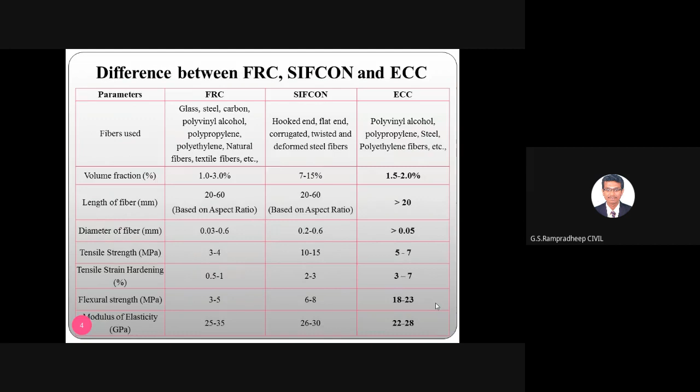For that, you need to optimize these materials by making various iterations. So my humble advice: don't go immediately for experimental work. Before that, make trial and error using software. You can go with Excel, or MATLAB, or ANN (artificial neural network analysis), or ant colony algorithm. There are different optimization softwares available. Even you can develop your own C programming coding, make the iterations and get the optimization results.

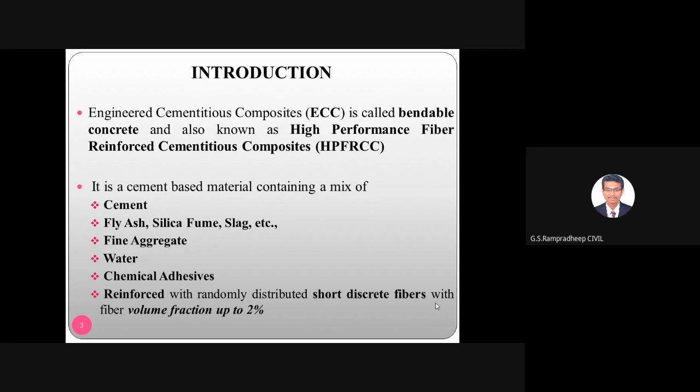Go to the experimentation work and find whether the simulated work as well as the experimental work get matched. So abroad, they are first going for simulation study using their own coding.

Or if you want to have the optimization, you can have the triangle chart. Mostly they will go for fine-tuning the cementitious materials - how to fix the fly ash, how to fix the silica fume, how to fix the GGBS, like that. This is called the ternary chart, TERNARY, ternary chart.

So we will see some literature background, one or two related to the importance of ECC or bendable concrete. Here in this ACI Material Journal, which is one of the top journals in the American Concrete Institute, they have used high volume fly ash more than the prescribed limit. Here we are using, as per regulations, not more than 27 to 30% as per the replacement of cement. So in this HVFA, high volume fly ash, to improve the ECC, they are concentrating on two properties.

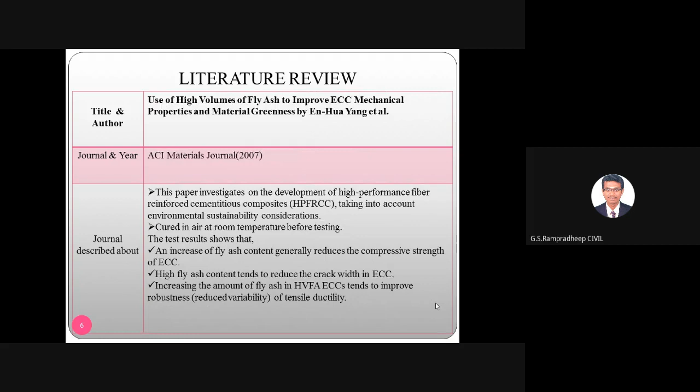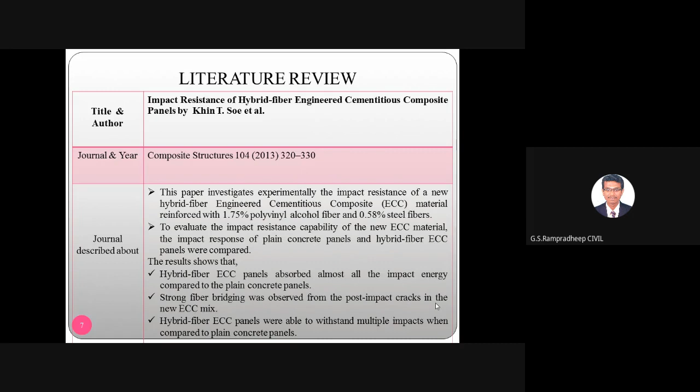So initially I showed you the article related to material as a replacement for cement. Second, related to impact analysis for structural property. Third, I am showing you the flexural behavior of ECC slab with PVA fiber, which was published by Shwan H. Said et al. in CBM 2015 edition.

2015 year of publication. What he described and investigated is the effect of polyvinyl alcohol fibers on the properties of panels like toughness, compressive strength, and flexural strength of cubes and slabs. This is what he observed in his study using polyvinyl alcohol fibers.

PVA fiber, how much is added is maximum to 3%, and it is observed that the compressive strength decreases as the reinforcing index increases.

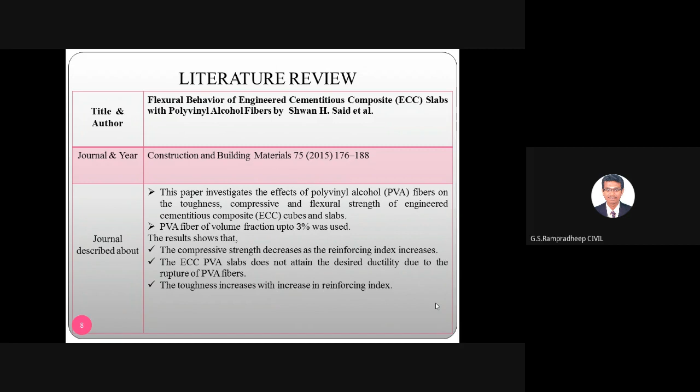The toughness increases with increase in the reinforcing index. The toughness means, in Tamil it is called kadinattanmai, the well bonding effect. Due to this well bonding effect, your membrane can be protected in emergency cases, right?

Next design is waterproofing manufacture, preparation of membrane in a well-designed waterproof. So matrix designed for waterproof ECC by Jing Yu et al., which is in CBM 2017 year of publication. It describes about waterproofing technique adopted with ECC.

See, normally, don't think that only for ECC we can make it for waterproofing. In normal concrete also we can go for waterproofing analysis, even if you are using epoxy, right? So you can make it as an impermeable membrane such that external atmosphere, humidity or something will not enter inside.

So in most applications for concrete or steel, they will go for epoxy coating. In steel, you can see a green color steel rod, which is an epoxy coated rod, where somewhat your steel will be durable and strong enough compared to a normal steel, right?

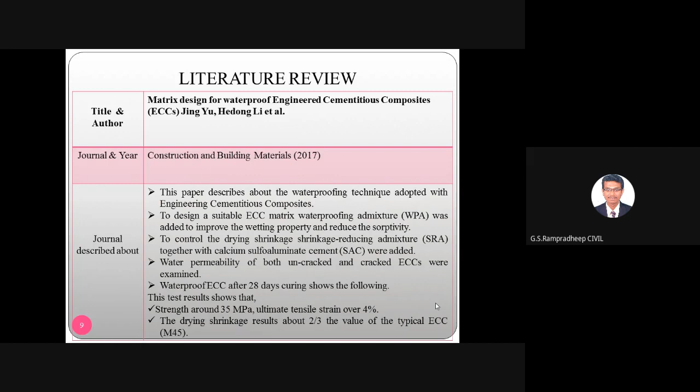The next combination is the self-healing ability of ECC material under different environmental exposure. Zhigang Zhang et al., CBM 2017, denotes that ECC normally contains large amounts of cementitious material together with self-controlled tight crack width, so it is capable of high self-healing potential.

We have a doubt here - what is the difference between enzyme addition self-healing and ECC based self-healing? In enzyme addition self-healing, we focus on the core layer, the core matrix, whereas in ECC based layer, we focus on the surface matrix. If we focus on the surface matrix, the core matrix also gets stabilized.

Someone can tell me, am I audible? Yes sir, audible. Okay, thank you.

To further accelerate this potential, addition of hot water at 60 degrees and Ca(OH)2 solution is used - this is nothing but hot water curing. As I pointed out in the 13th class, different types of curing suggested by IS 456, section 13.5, like membrane curing, steam curing, and polyethylene wrapping, prevent the escape of moisture from inside to outside for better hydration. Here they are using hot water at 60 degrees centigrade as accelerated curing.

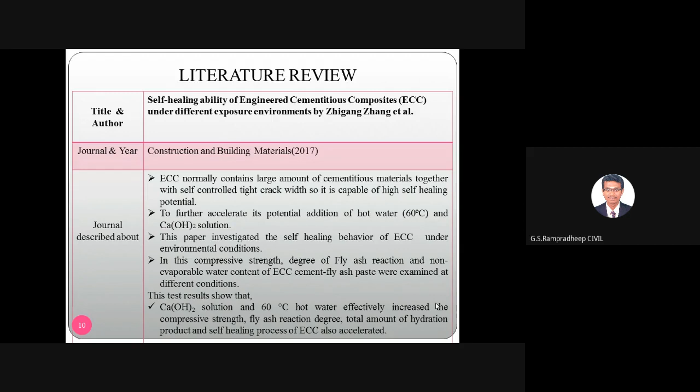So in different parts of the literature, I have covered you, and now we are going for the need, the purpose for the study. Every research should have two things: the need and the gap analysis. So it should be coincidence. Based on the gap analysis only, based on the need only, the gap analysis can be framed.

The application of ECC can be expanded for various infrastructure sectors in the future. There are certain limitations in application where monofiber, a single fiber, ECC is used, so there is a need to improve the properties of ECC with the monofiber. I already told you that many researchers are working with only one single fiber and with hybrid fibers to analyze the mechanical, chemical, and durability properties of the ECC.

Here, polyethylene, PVA, and polypropylene have better performance in strain hardening effect, with ductility under least amount of load under tension. So for the least amount of load, your structural property is enhanced by using the above type of fibers, which is mentioned by Victor Li et al. in 2001.

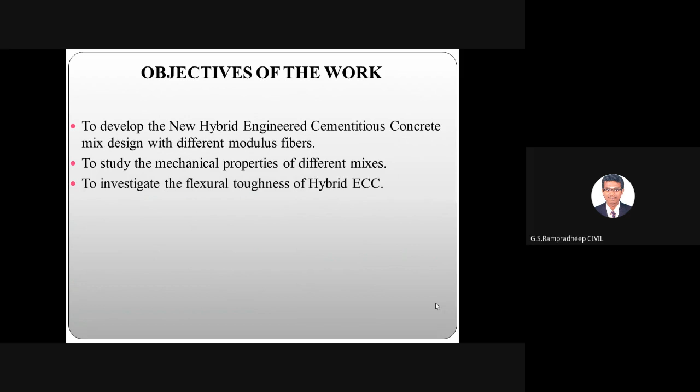So what are their objectives? To develop the new hybrid ECC mix design with different modulus — as I already pointed, low and high — and to study the mechanical and flexural properties of the ECC with fibers.

So what materials are they taking? They are taking OPC 53 grade cement, fine aggregates, coarse aggregates, and so on. For mineral admixture, they are restricting only to class F fly ash because they are not going for other mineral admixtures like silica fume, metakaolin, GGBS, quartz, and so on. So they are restricting the mineral admixture only to fly ash.

Why are they restricting it? Because if we take other conditions of mineral admixtures, the research area will be larger. So he is taking one mineral admixture, 53 grade cement — not going for 43 or 33, he is restricting that too. He is not going for PPC, because PPC already incorporates about 22 to 24% fly ash. So he's going for OPC and separately for mineral admixture class F, and SP he's going for Conplast 430, and reinforcing steel he's going for FE 400, FE 500, where the ultimate stress is 500 MPa.

He is using 4 kinds of fibers: PVA (polyvinyl alcohol), polypropylene, steel fiber, and glass fiber. You can see the different corrugated fibers as I pointed out in the application study. Here in the ECC, steel fibers like these will be used, and these are the corrugated fibers: polyvinyl alcohol, polypropylene, and other different fibers they are using.

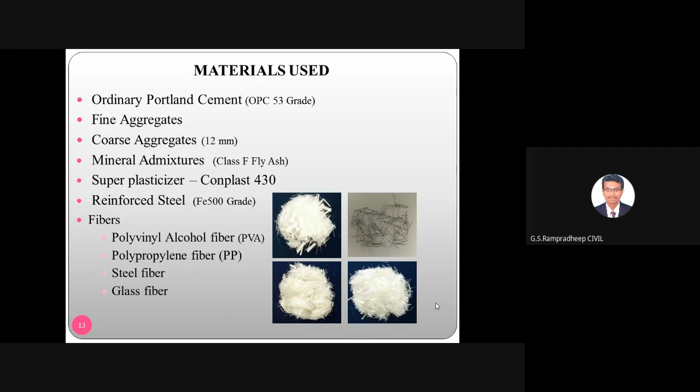Here we will have one doubt: surely if we are changing the basic ingredients, basic properties of the fiber, that is length to diameter, ultimately the mechanical property will get differ. That is obviously true, right?

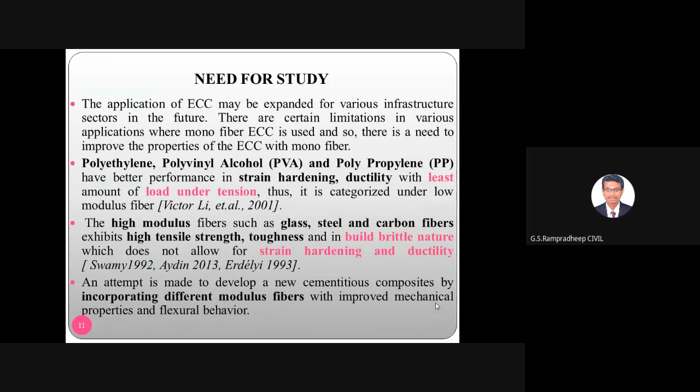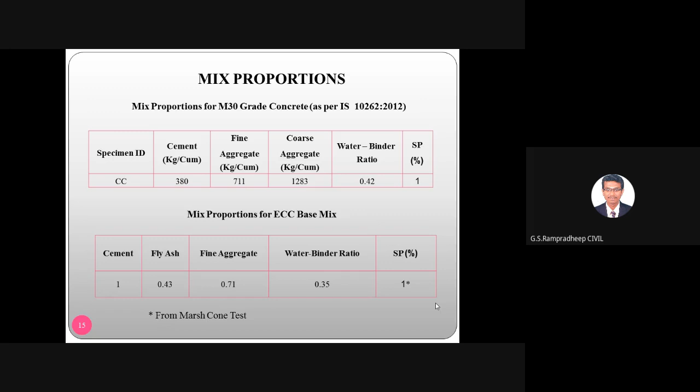Care should be taken that the strip should be in a length of 1 foot, and the loading ram should be exactly placed over the strip. There should not be any double side overhanging specimen, and when you are giving the load, it should be like a UDL.

You can get the mechanical property from IS 5816 code of practice, and the splitting will happen from 2P divided by pi LD. If you mark it out, P is the load acting over the membrane, pi is the circumference, L is the length and D is the diameter of the specimen. L is 30 centimeter and diameter is 15 centimeter. So by splitting, we are getting the indirect tensile strength.

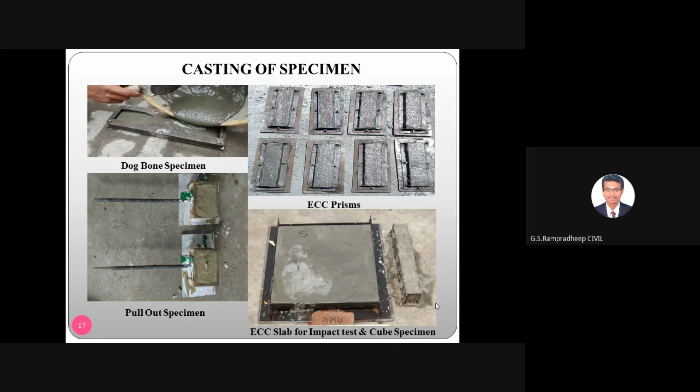And if you see that last photo, it is mentioning the ECC slab for impact test and cube specimen, where he is using 60 centimeter cross 60 centimeter.

So this is a sample, 7 centimeter cube he has casted along with dog bone specimens. It is in the curing stage, and the reinforced concrete beam is under testing. Actually, it is going for flexural analysis.

And he went for the beam analysis, the flexural beam, where you can see the length as 2 meter outer to outer, and from center to center 1.8 meter, clear 1.8 meter beam. He used shear two-legged stirrups at 100 mm spacing center to center, with 6 mm diameter rod.

The cross section you can find at the bottom, where at 30 mm from the bottom he is using the ECC layer, 30 mm thick. The remaining place is filled with concrete, and the depth of the beam is 150 mm and the width is around 100 mm.

The main rod is 8 mm diameter, 2 rods, and the hanger bar he is using is 6 mm diameter, 2 rods. He is designing for a minimum load carrying capacity of 17.9, based on his theoretical research done in Excel.

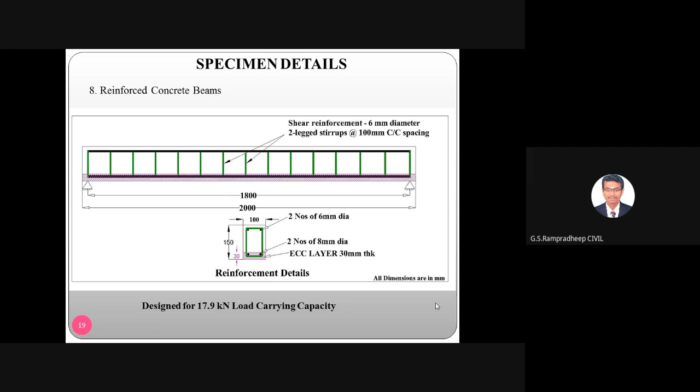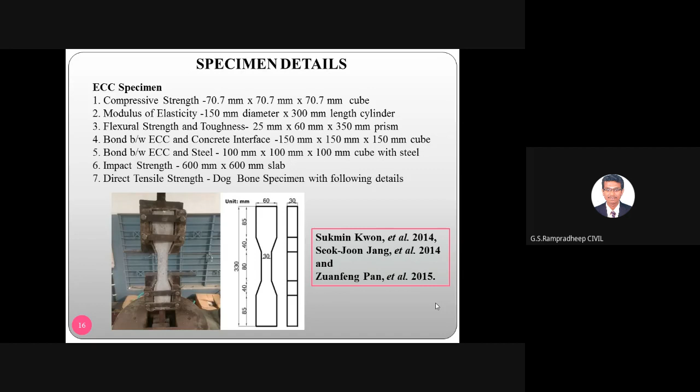So for bond test analysis, as already pointed out, this is for class number 4, 150 mm cube size, where half portion is made with concrete and the remaining half portion is made with ECC. We need to understand the interface, the joint interface between the concrete and the ECC membrane.

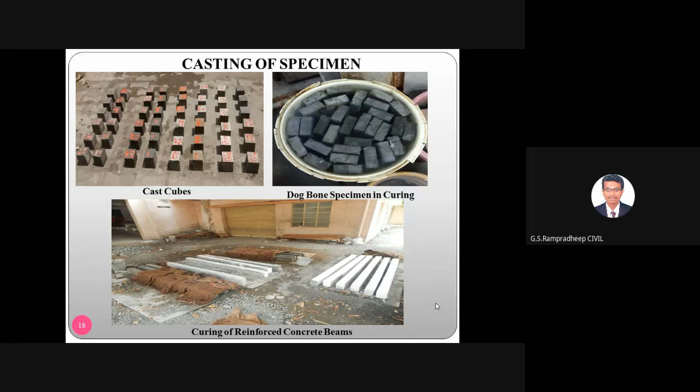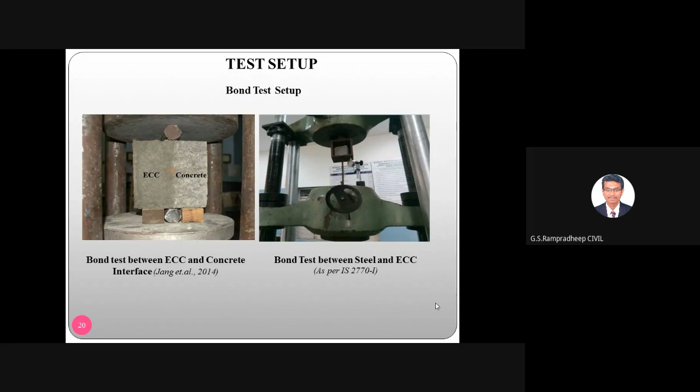This test has been made as pointed out by Jang et al. in 2014. In the right side photo, you can see the test for bond between the steel and the ECC, where we made the bottom left side photo for the pull-out test. So he is making the bond test between the steel and the ECC as per IS 2770 first revision.

Here you can see the impact test setup. This is one we have fabricated in our lab, this impact testing machine, the yellow colored base and that structural supporting element, that we have fabricated. This is a drop down test where the standard hammer weight is 7.5 kg, and we are dropping from 1.6 meter.

We have given the provision for drop down. This setup actually we manufactured for the ACI (American Concrete Institute) drop test experiment, a standard study. So we have fabricated it for that, and we are parallelly using this equipment for studying the impact analysis also, right?

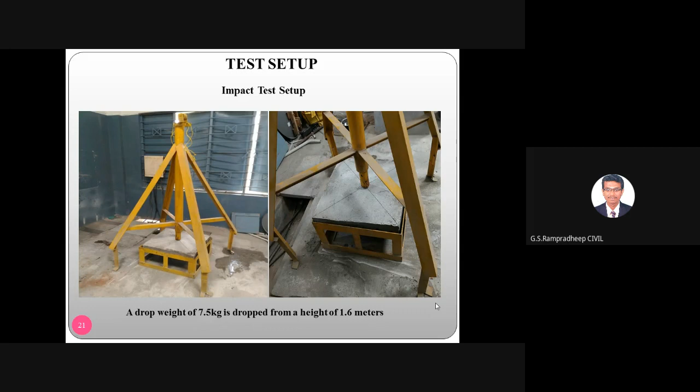So they are dropping at a standard height of 1.6 meters over the slab, and carefully you need to mark the center of gravity. That center of gravity of the slab should coincide with the center of gravity of the hammer. Why is this necessary? If eccentric loading happens, then your crack pattern will be at different phases. Surely it will get resistance, but the resistance will not be proper. So the impact you are making should be marked at the center, and that center should coincide with the center of the specimen.

After that, he has simulated the fiber—PVA, PP, and glass fiber—under simulated pore solution, as per Chen et al. paper. The CSH gel formulation is simulated outside the concrete by dipping the fiber in the combination. You can see in the first photo the PVA, PP, and glass fiber. He has taken each fiber separately with mortar and dipped it in the solution.

That solution combination is sodium hydroxide (NaOH), potassium hydroxide (KOH), and calcium hydroxide (Ca(OH)2), with distilled water in the ratio of 8.17 to 0.83, balancing the pH at 13.6, observed for 35 days. Based on how 8.17 is arrived at, it is based on the molarity, as in Yi Chen et al. paper, where you have all the details based on molarity. He gets that ratio, and based on that ratio, he fills the fiber inside the specimen—the glass tube—and observes it for 35 days.

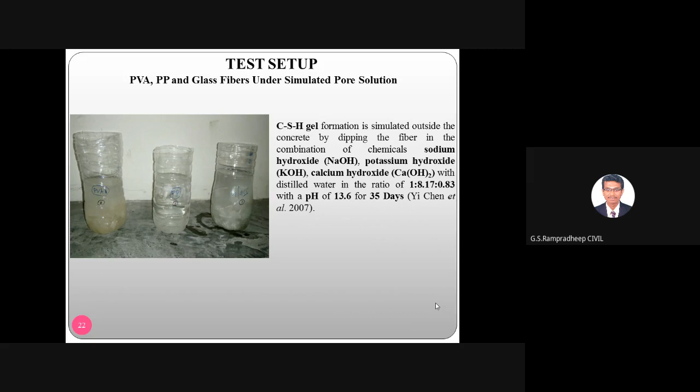This is based on Yi Chen et al., 2007 publication. Here, for test results of fibers, he observes two conditions for each type of fiber: raw fiber and dipped fiber. SPS means simulated pore solution fiber after dipping. For PP, again raw and SPS; for glass, again raw and SPS. You can see the physical appearance of the fiber, where the physical nature—the color difference—seems to differ in the PVA fiber.

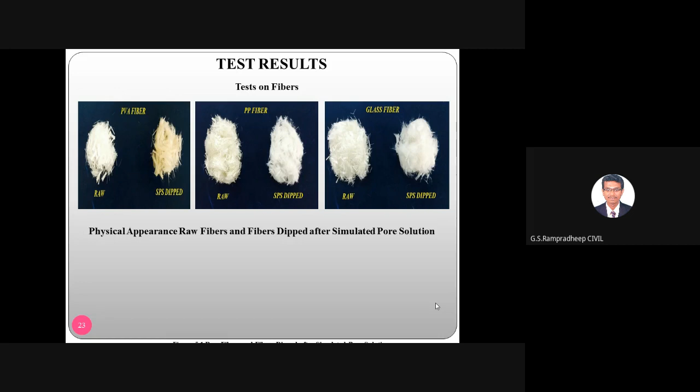Based on FTIR analysis, you can get the downward peak, which shows around 2005. PVA shows good resemblance in FTIR, meaning Fourier transform infrared spectroscopy. The downward maximum peak comes around 2000 to 2500 wave number. For SPS, as well as for PVA, the coincidence can be viewed. The second coincidence, the maximum coincidence for SPS, comes around 1000 to 1500, where we take the maximum number. If you want to make research only on FTIR or microscopic analysis, it can be a separate research.

It is possible to make collaboration with physics people, chemistry people, or even metallurgy people. In some cases, mechanical divisions use different kinds of fibers, including two natural fibers. You can club them together and make the analysis.

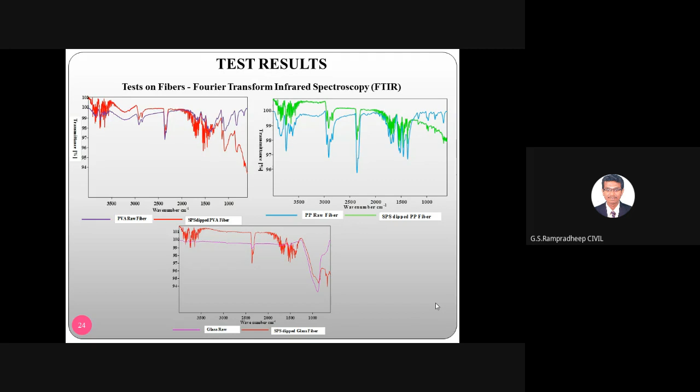On the y-axis, you can see the transmittance, showing how the wave pattern is transmitting. For the raw fiber of PP, you can see between 2500 to 2000 there is a high peak in the raw fiber emittance. You need to take the highest wave number, the highest peak for that particular wave number—if it crosses beyond 2000, it will be good. You can see the SPS dipped fiber for glass showing around 2400 transmittance value.

Similarly, for gravimetric analysis, it is one of the thermoanalytical techniques—thermal analysis technique—where we obtain the outcome with respect to mass versus temperature. For example, if I am breaking the concrete and taking it outside, a pinch of the concrete is placed in the DSC machine. With respect to mass, how I am placing it, and with respect to temperature, how it is inducing—if the temperature is inducing, how the mass percentage changes or doesn't get disturbed. If the mass is not disturbed, that comes under TGA analysis, thermogravimetric analysis.

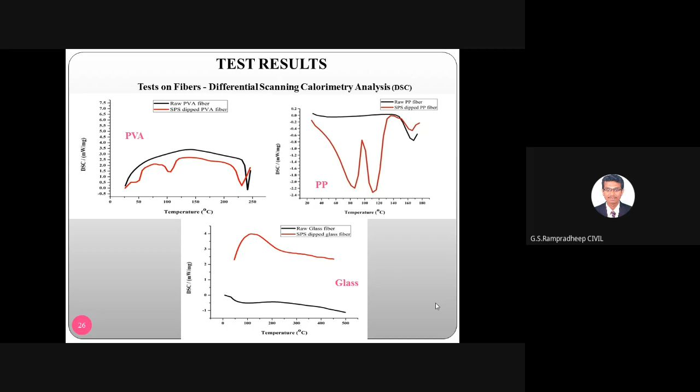be the analytical technique where the difference in amount of heat which is required to increase the temperature of the sample, as a function of temperature. So in this type of test, differential scanning means if I am keeping the particle in the DSC element, the scanning will occur. How much is due to that scanning, how much of the particle is getting disturbed, is given by the differential scanning calorimetry.

And you can also get the field emission SEM photograph of the raw fiber as well as the SPS fiber. The morphology, the texture, you can able to get it. And for different types of fibers, you can get the SEM analysis.

Not only for ECC, for all kinds of material, even for sand, if you are using, we are assuming that the sand has this grading, but whether it is coming under this size or the texture or the angularity, that should be clearly mentioned. We are assuming it as angular, but if the SEM analysis shows it is rounded, what do we have to do?

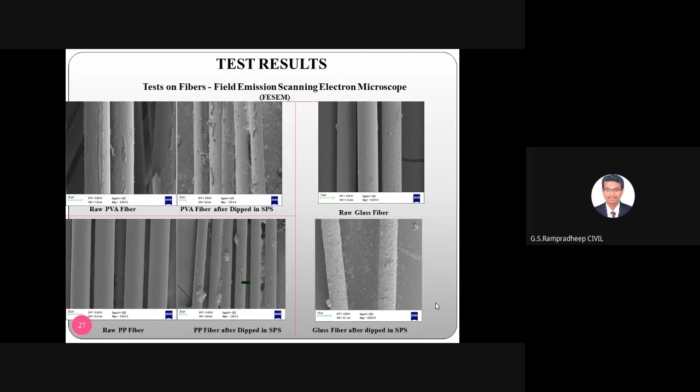So most of the aggregates, especially the lightweight aggregate coming under the hollow glass microsphere and ceramic microsphere that I have shown you now, the surface will be a very good texture. A round like structure will be there, so SEM analysis morphology for each ingredient is also very important.

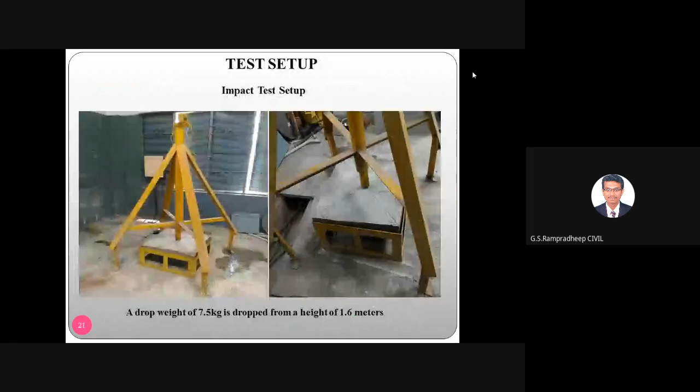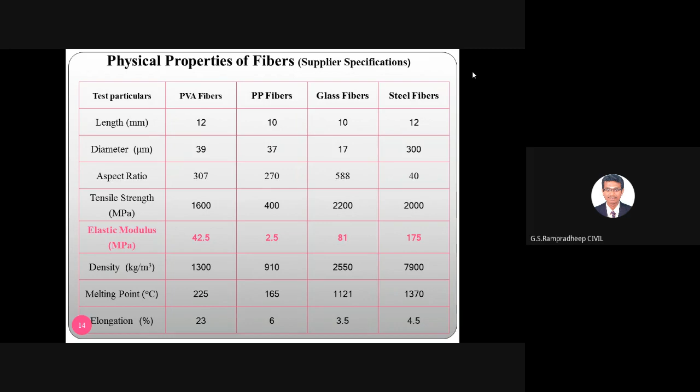for tensile and flexural strength and bending resistance, glass shows better resistance than steel, because of the density, as we have already seen here. You just see the tensile strength is 2200 for glass and 2000 for steel fiber, and because of this, there is a slight increase in the tensile and flexural strength for glass compared to steel.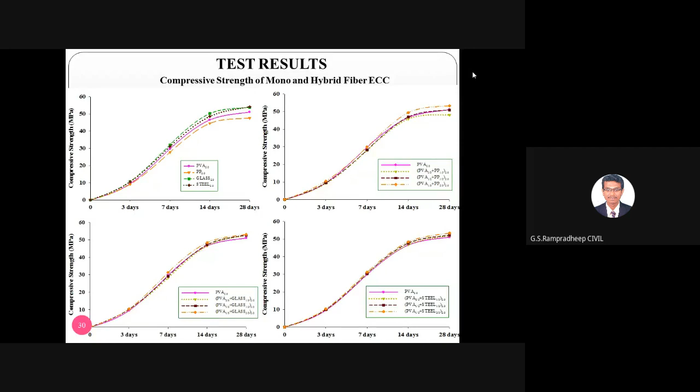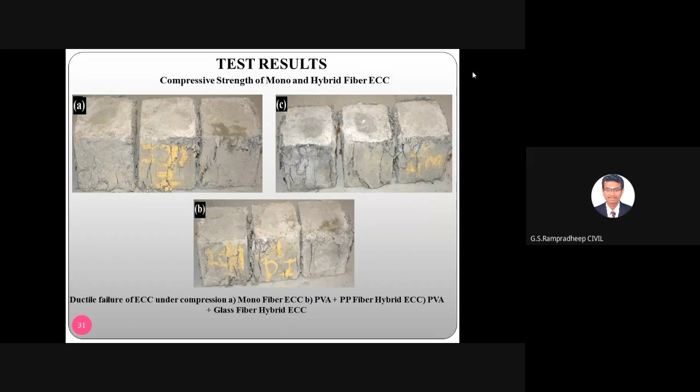For 28 days, steel is slightly greater than glass. This is after the compressive strength analysis of the monofiber, where division A is the monofiber ECC, and B and C are blended fiber.

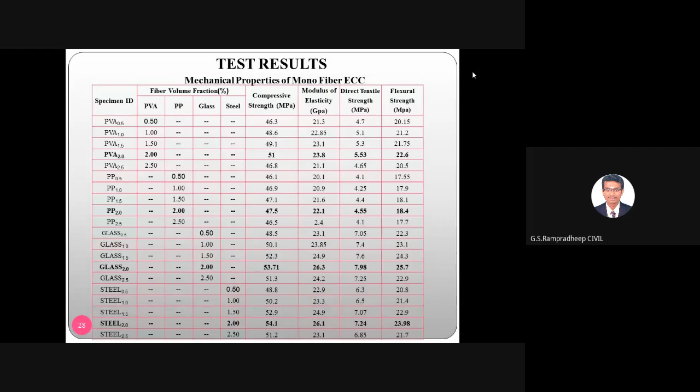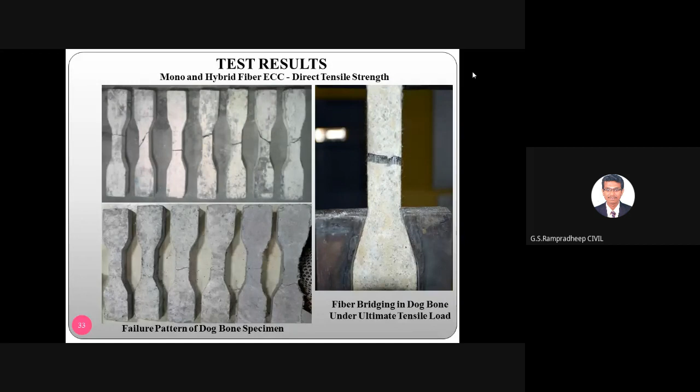You can see the direct tensile strength for all these categories observed from this table. This shows the direct tensile strength of dog bone specimens tested for many different fiber types, along with failure patterns. You can see a beautiful photograph showing the fiber gap bridging. Whereas if you add bacteria like this, you can't see this kind of bridging gap, it can only arrest the core layer. And you can see the flexural strength.

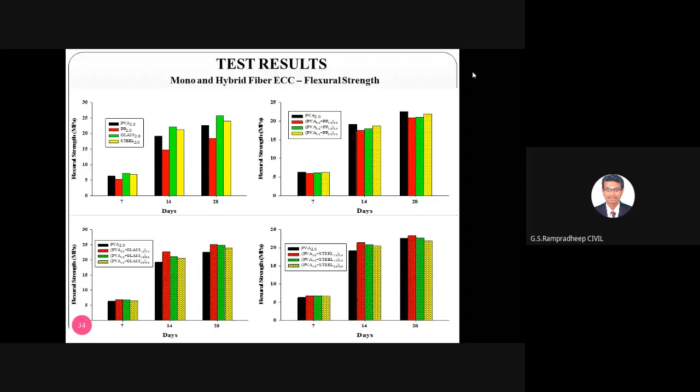They tested ASTM C1018 flexural toughness value by making a prism, a thin slab material, with 2-point loading as per Zwick universal testing machine of 100 kilonewton. You can see the maximum load carrying capacity is 34 to 35 kilonewton peak value, and the maximum deflection is around 11.9 to 12 mm.

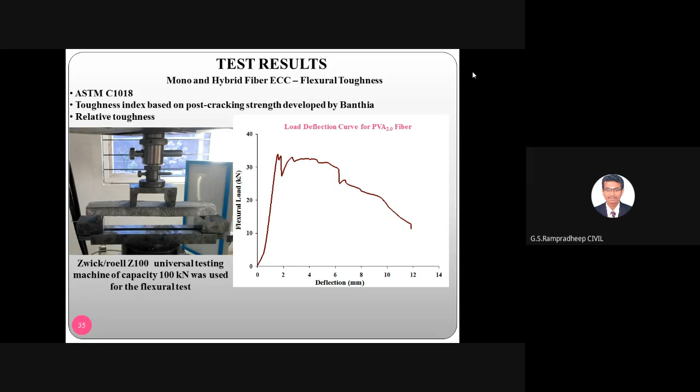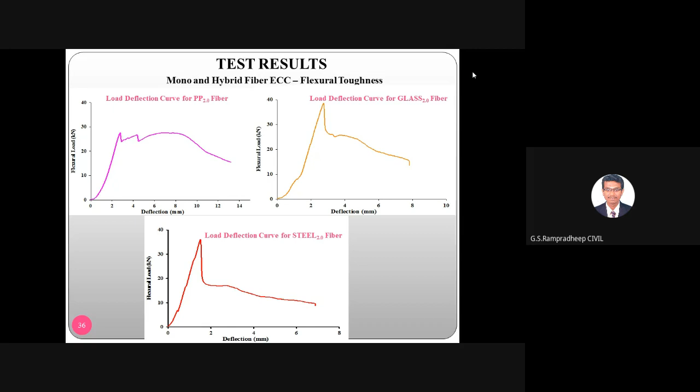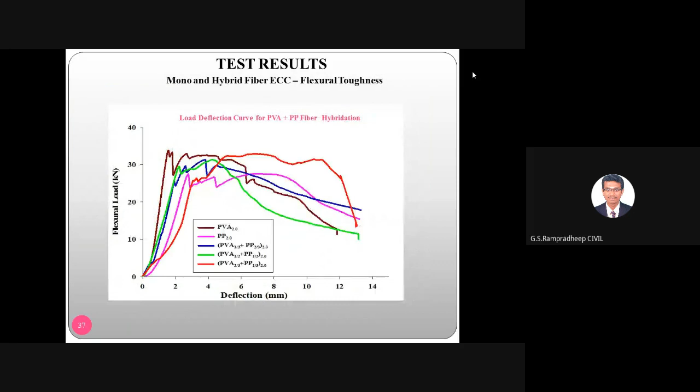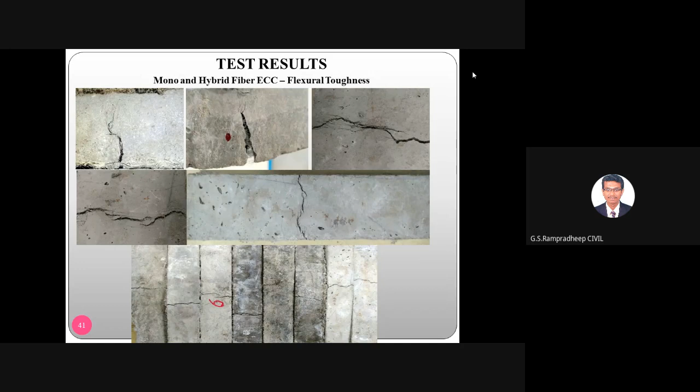You can see the flexural toughness graph for this slab. After failure, you can see this bridging gap, and the different slabs are mentioned here, showing the bonding behavior between ECC and conventional concrete, and this is the failure interface.

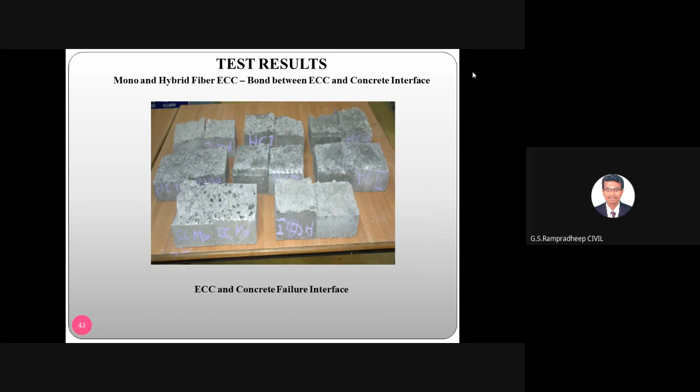This is the impact test analysis with a load of 5.74 kg, 56.31 Newton. The first crack appears at 25 blows, and the specimen fails at 330 blows for conventional concrete. The first crack value is calculated as load into distance, and based on number of iterations, we get this.

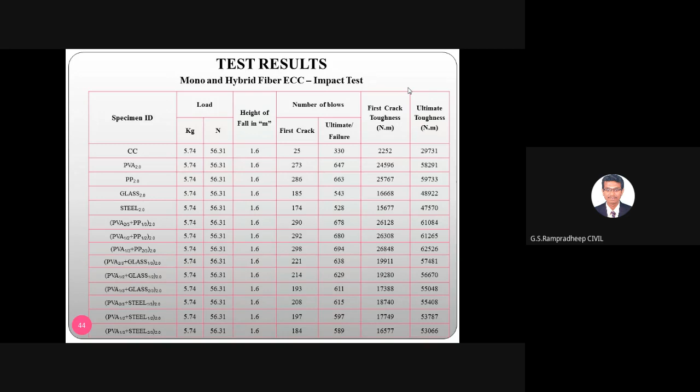This is for the flexural behavior of beams, showing the maximum load for a 1.8 meter beam, its ultimate deflection, yielding point, plotted as a stress-strain graph. It also shows maximum ultimate carrying load and ultimate deflection for different fibers. For example, ultimate deflection for PP is around 48 mm, while PVA plus PP is around 45 mm. PVA plus steel reaches 22 kilonewton, and maximum for steel is 23 kilonewton. Initially we had designed for 17 kilonewton.

In the earlier slide I mentioned we initially designed for 17 kilonewtons, but when using monofiber as steel and combo fiber as PVA plus steel, the load exceeds the design load, so it is safe. If it is less than 17 kilonewtons, we have to monitor. For monofiber steel at 2%, the load carrying capacity is around 24 kilonewtons, and for combo PVA plus steel, we get 22 kilonewtons, which is 5 kilonewtons extra than the design load of 17 kilonewtons.

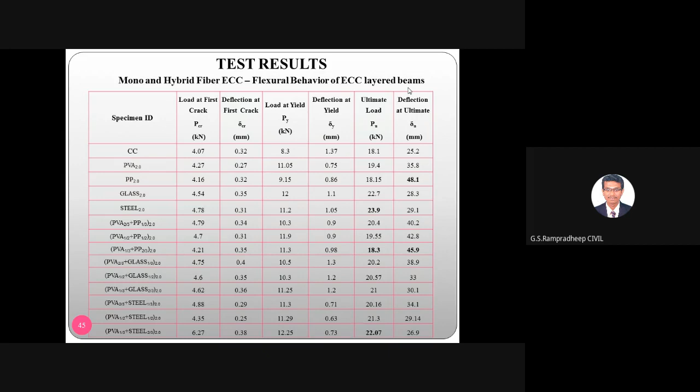From this, we conclude that from the FTIR analysis, there are considerable changes in transmittance of PVA and PP fiber, whereas glass fiber shows better resistance, due to its high modulus.

From thermogravimetric analysis, TGA, it is found that raw PVA and PP has more residual mass, whereas glass dipped fiber and glass SPS, simulated pore solution dipped fiber, has more residual mass. Similarly, for DSC and SEM analysis, there is no degradation or reduction in cross-section area of the fiber, and the morphology seems very good.

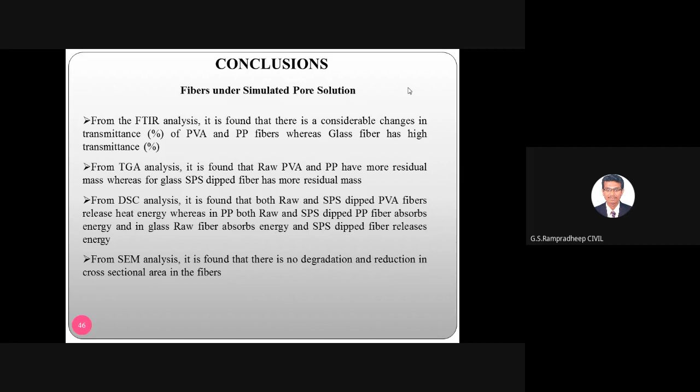In the compressive strength test, steel possesses 6% higher results than PVA, and the hybrid matrix with PVA 1/3 (33%) and steel 2/3 shows 4.5% higher compressive strength than the PVA mix. You can also get the modulus of elasticity value with respect to PVA as well as PVA plus glass. For direct tensile strength, the mixture was found to be 44% higher strength than PVA, and PVA plus glass shows greater than 25%. So they are comparing and obtaining PVA and glass as a better result compared with the low modulus PVA fiber.

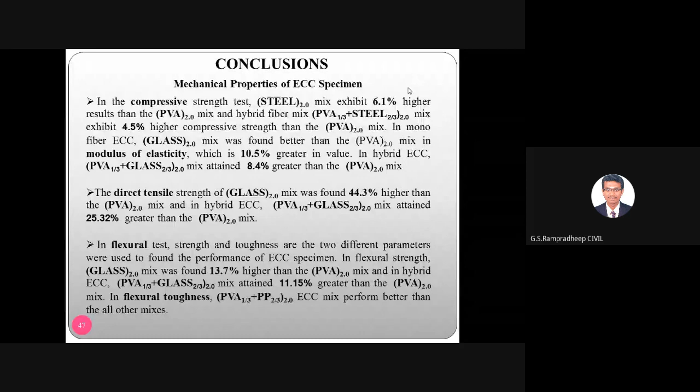And this is for hybrid fiber analysis. So his publication list, and these are the references. I hope I have taken 5 minutes extra, sorry for that.

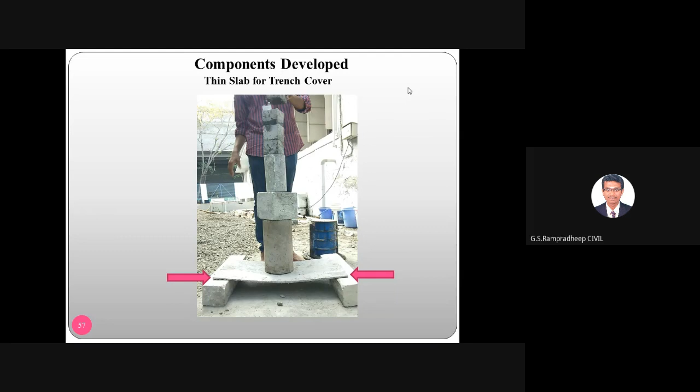In the laboratory, under his supervision, students developed a thin membrane, and instead of regular support, they placed a conventional prism, and over that an ECC membrane, a hybrid ECC membrane, was placed, and loading was given. You can see the buckling. There is no reinforcement placed inside, and you can see the bending. If you remove the load, it should come back to its original position, that is a ductility based concept. So he is developing this for a trench cover like design.

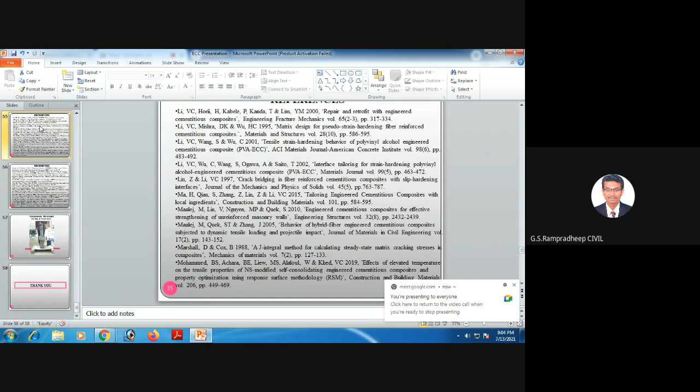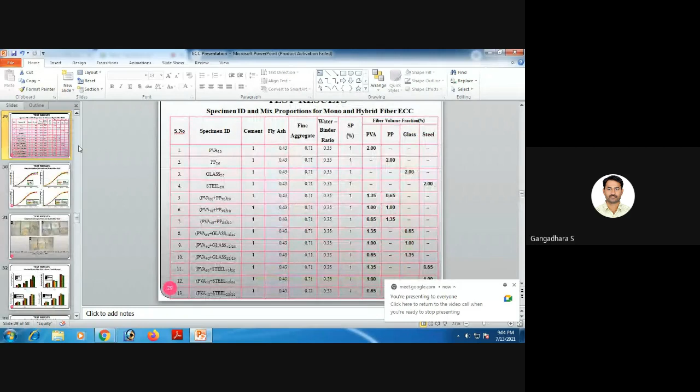Okay, so sir, actually if you see, I have shown you the slide. Based on the time, I will cut short. I think I have shown you the mix design, right? Yes sir, I have seen that, this mix design. Are you able to see this?

Yes sir. Okay, so here you can make the variation in the fly ash, but if you are varying, for example, if you are varying the percentage...

Shall I proceed, sir? Sir, my name is Shivkumar, I have one small doubt, sir. Just wait, sir, let me clear his doubt first. One person, Kumar, is asking the doubt, sir, another person is clearing the doubt. Please wait, Sukumar. Thank you, sir.

Sir, actually you can make the variation of the fly ash. For example, if you are using OPC of 53 grade, for conventional you can use 100% and fly ash percentage will be 0, and your maximum variation percentage is 30. For 10% modification, that is 90% cement and 10% fly ash, so you will have 3 variations. For these 3 variations, you need to make 4 different kinds of volume fractions. For each individual percentage of replacement, you need to study that particular volume fraction, for example, for 10%, what is the 2% of PVA, and for 10%, what is the 2% of PP.

For 10%, what is the percentage of glass? Like that. So the combo will be a 13 into 4 matrix. Each individual will have the 3 matrix extra. You can do it, but you need to refine it.

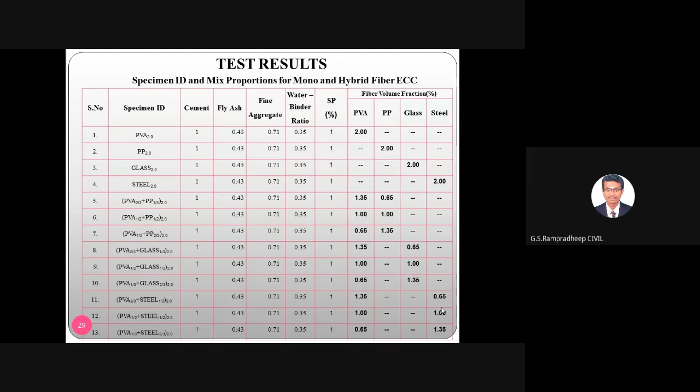What I am telling is, I have shown you the different literature reviews, right? From that literature review, you can take the optimized amount of fly ash, or if you want to go for different kinds of mineral admixtures like GGBS or something like that, optimize the percentage. From the optimized percentage, if you go for analysis, then your fine tuning of research will be easy.

Because when you are submitting to the examiner, it will be very tough. He will give more questions for the analysis. That is the right choice. First go for optimization, then you can go for the fiber matrix analysis.